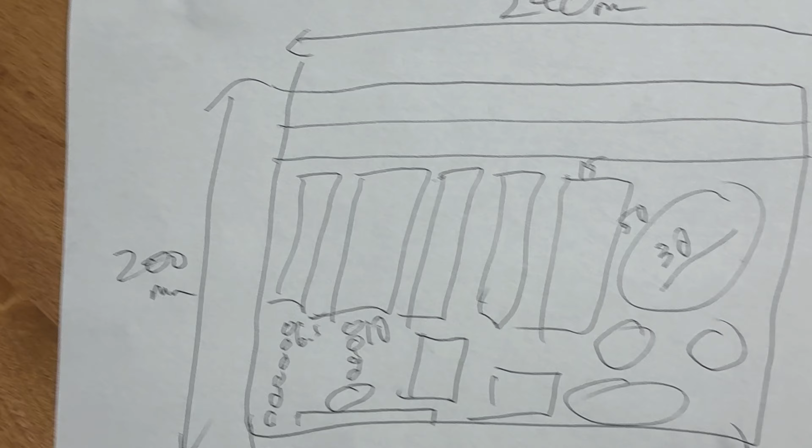For this particular design, we'll look at it from above and draw it as if we had an aerial view. Then we'll use that sketch to extrude up and create our tool holder. The first thing to do is sketch out a layout of how you want your tools, and also measure your tools with a digital caliper.

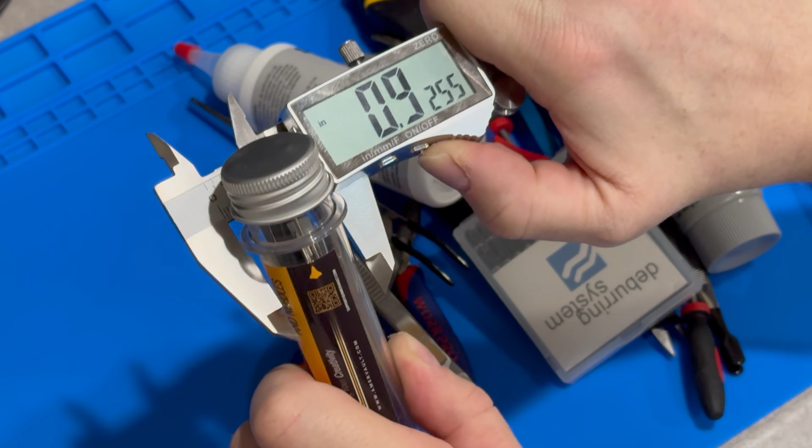Next, we're going to open Fusion, choose the top view, and begin a sketch. Now let's create a centered rectangle in the dimensions you want your base to be.

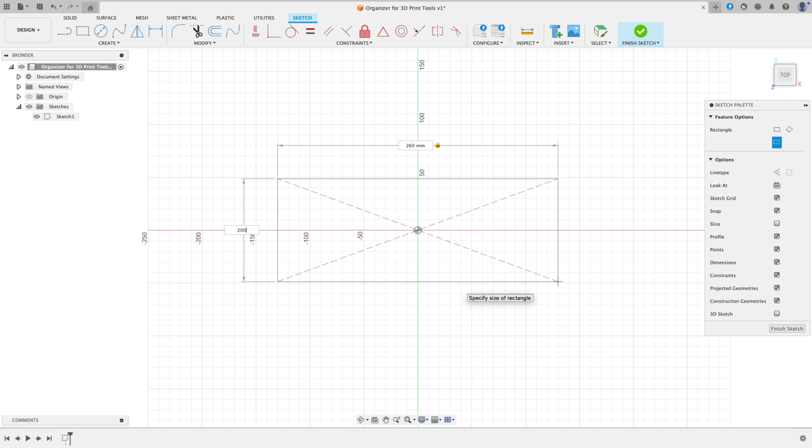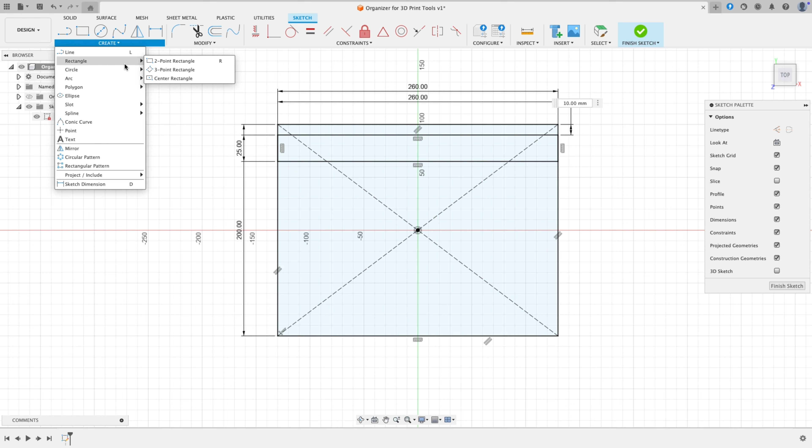The next step is to create a cutout for each of your tools. I'm going to start with a rectangle for my digital calipers. Throughout your sketch, you'll want to make sure that you keep it constrained. You'll know it's constrained with the little lock icon next to the sketch on the left-hand side. In this case, to do so, add a distance from the base rectangle to the first line of the cutout for your caliper.

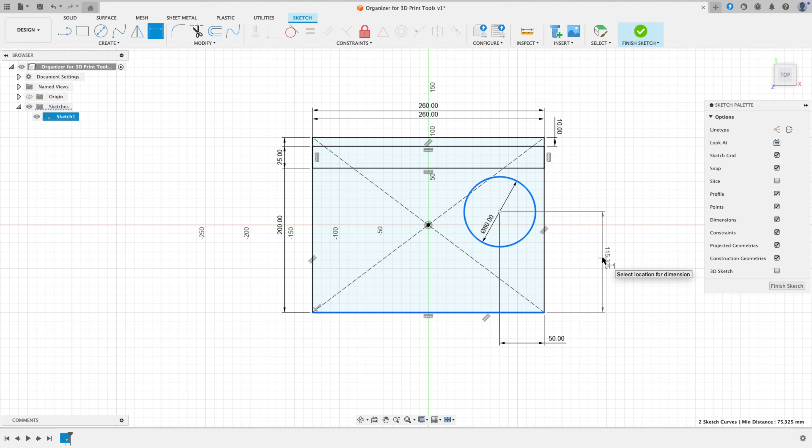Next, I'm going to create a circle for a tool holder, move it to where I want, and to constrain it, I'm going to measure from the circle to 2 points. Let's repeat that process for 2 more circles.

Next, repeat the process for an oval, and in this case, I'll also need to move around some of the circles to make everything fit.

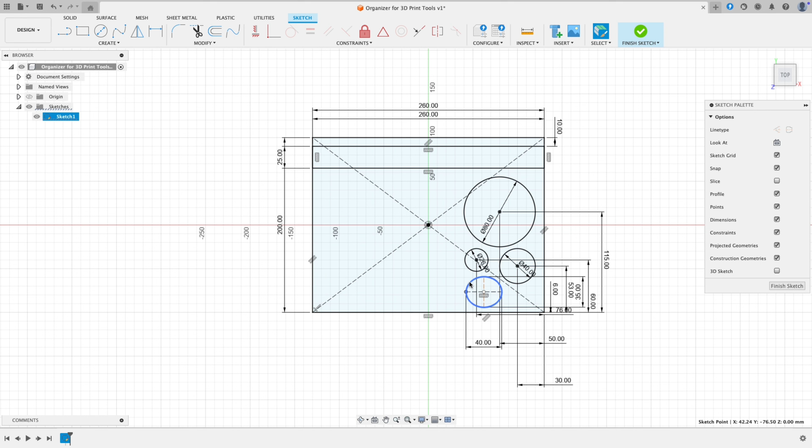Now let's create a series of rectangles for tool holders. Again, we'll use distances to constrain them, including the distances between each of the rectangles.

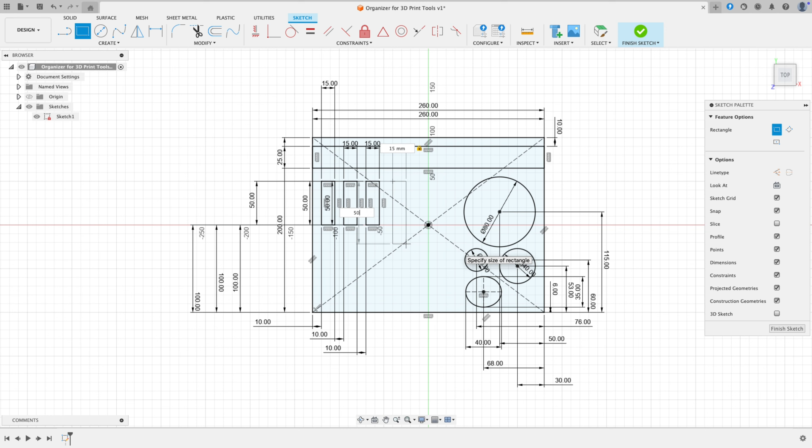Finally, let's complete the sketch. We're going to add some more circles for tool holders, as well as some rectangles. We'll use some collinear constraints to line things up as well. In retrospect, we probably could have used more collinear constraints throughout the sketch to line things up.

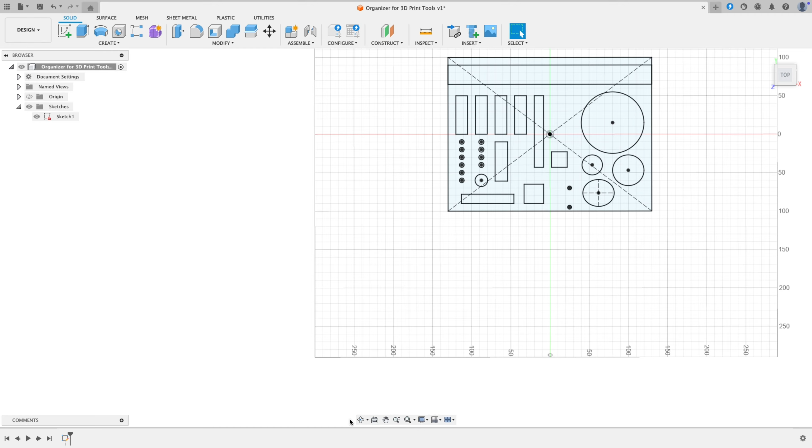Now let's extrude the base. Select everything in your sketch and hit extrude. Let's make the base 50 millimeters thick.

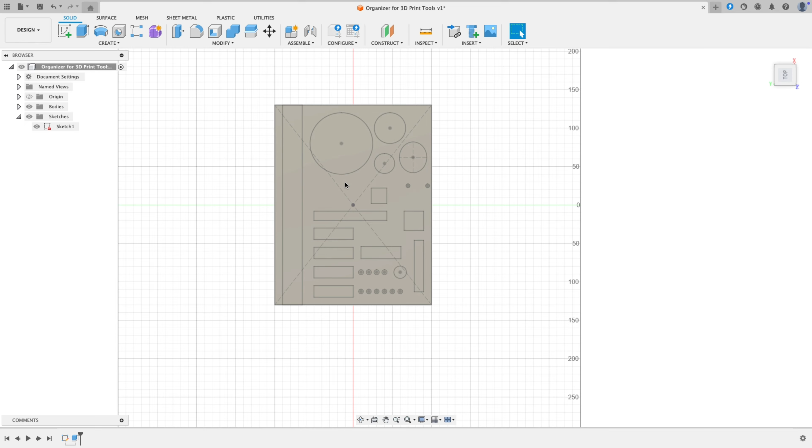Now hide the body and show the sketch. Select all the items shown. This time we're going to use an extrusion again, 15 millimeters from the bottom all the way to the top, to create a hole for the tools.

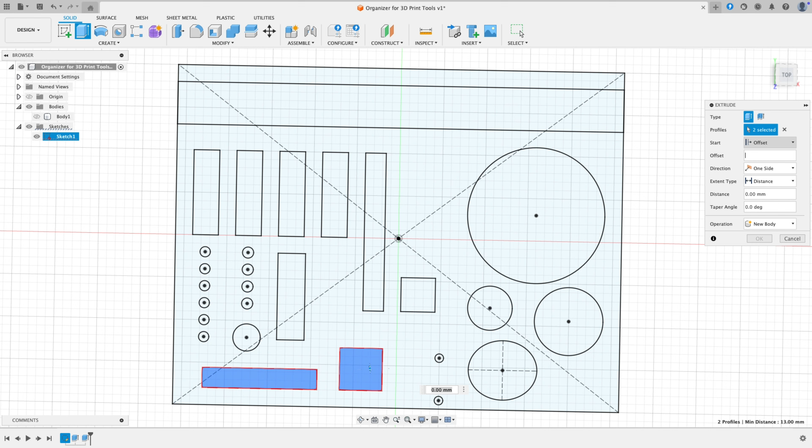For the last couple tools, we're going to repeat the process, except start at 40 millimeters from the bottom. Now to round over the edges, let's put a fillet on all of them of 5 millimeters.

Some of the items were too close to the edge, so I went back in and adjusted them. In addition, I noticed that the tool holder itself was too wide, and later on went and adjusted that. Once you make adjustments to the sketch, the model will be updated accordingly.

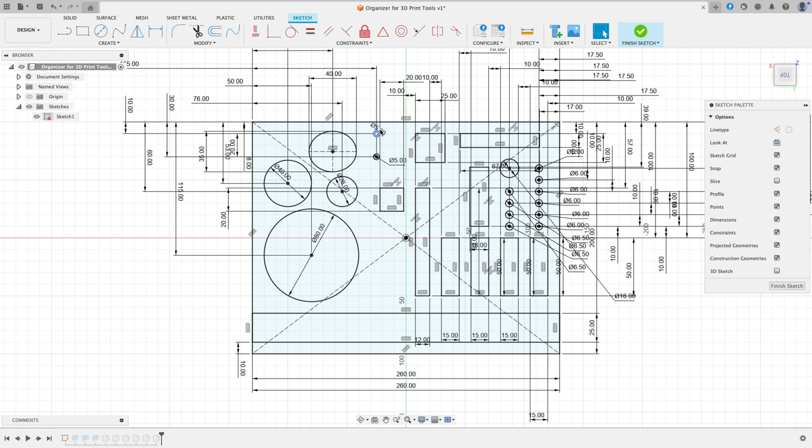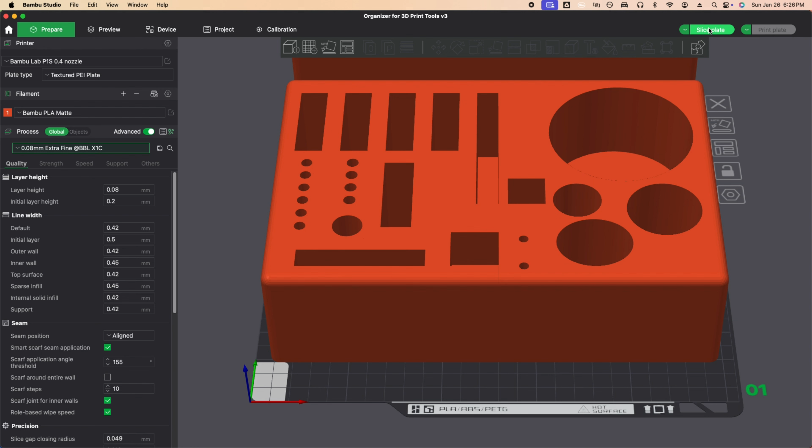Before leaving Fusion, be sure to export your model. Next, we'll go into Bambu Studio and slice. Also, make sure you choose the correct nozzle, the filament, and the settings you'd like to print at. Now it's time to slice the model. Let's print it.

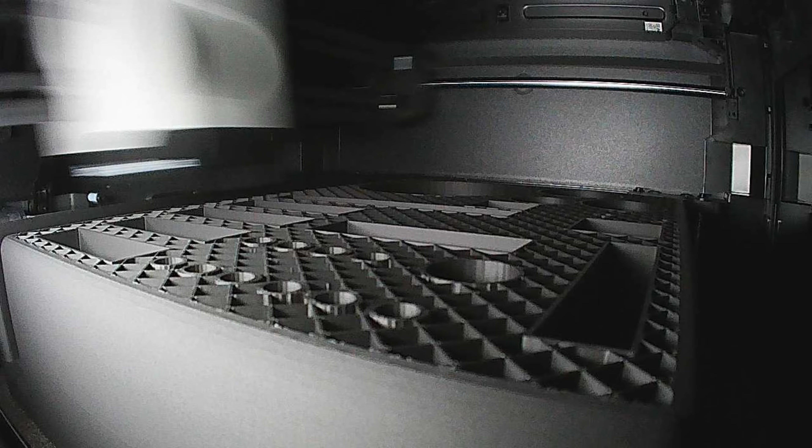You'll notice that the final product looks a little different from what was in the sketch. I'd like to remind you how important it is to measure twice and cut once. Somehow I made some mistakes with my measurement. I don't know if the caliper got reset to 0 or something along the way. So I had to make some adjustments to the sketch and print it a second time.